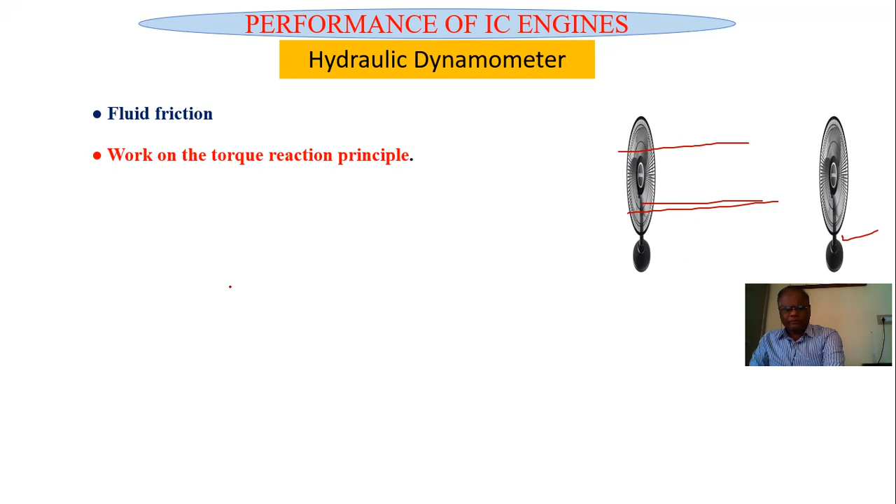This is called the torque reaction principle. Even though the force is not given from an external source, the force is available from some other component. Due to that force, this second component also rotates with the first component. This is called the torque reaction principle. In the hydraulic dynamometer, fluid is filled; here air is used as the medium, there the fluid is the medium. With this principle, the hydraulic dynamometer is constructed.

This is the diagram of the hydraulic dynamometer. The hydraulic dynamometer consists of the shaft. This is the shaft, which is connected to the engine shaft with the help of a flexible coupling. This is the rotor. The rotor passes through the shaft and is fixed on the shaft. The rotor consists of holes, blades or cups. This single hatching you're noticing is the rotor cover. The rotor cover also passes through this shaft, but it is not fixed on the shaft. It is kept on the trunnion bearing. It is free to rotate on the trunnion bearing.

There is a perfect airtight seal between this rotor cover and the outside. The water supply is given to this hydraulic system, and the water outlet is also there. This whole assembly is kept on this structure stand. The rotor cover consists of a load carrying bar, or load bar, and a load hanger. Because this is the sectional front view, it cannot be shown; assume it is connected to the rotor cover on the back side. Now, the operation: as I told you, the rotor consists of holes, blades, or cups. The rotor cover also consists of matchings of the same as the rotor.

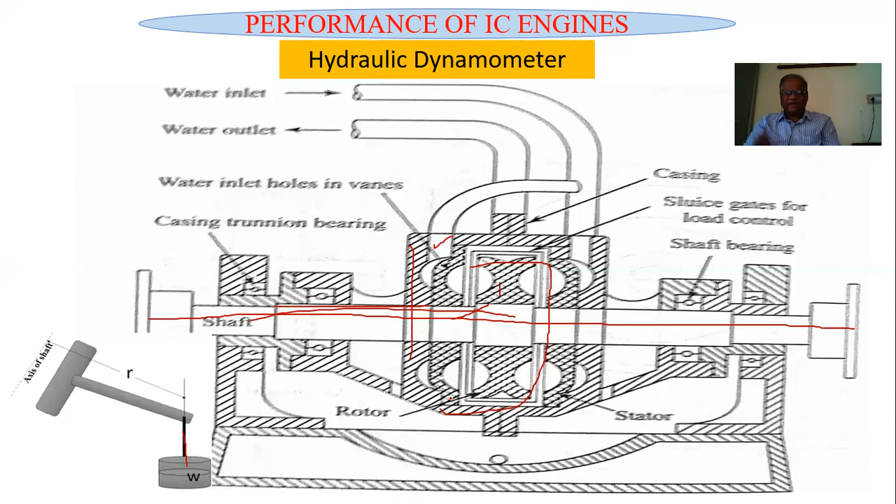Okay, this is the construction and working of the hydraulic dynamometer. How much torque is set up by this hydraulic dynamometer? Okay, as I told you in the previous lesson, the torque is nothing but the force into perpendicular distance. I have shown, say, this is the load bar. This is the load bar, which is connected to this rotor cover, and this is the load. The distance has to be measured from the axis of the shaft. That's why the distance is shown from here, not from here.

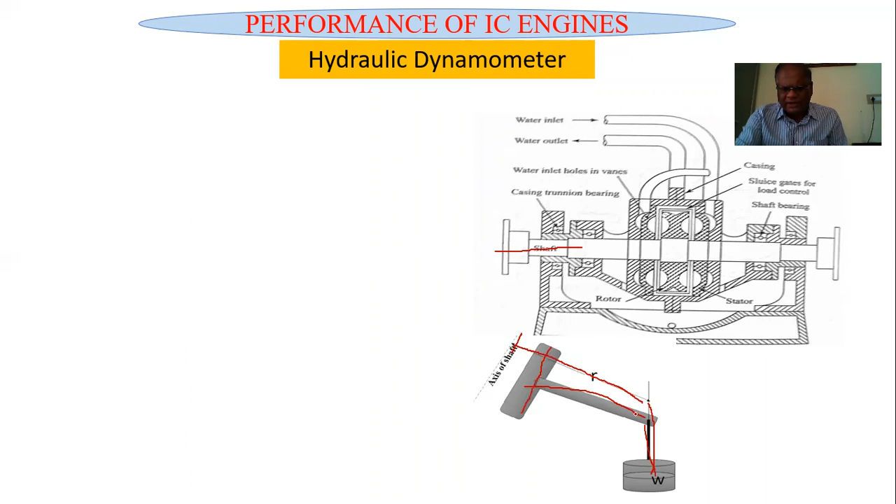See, this is the distance between the axis of the shaft to the line of action of the hanging load. That means this is the perpendicular distance. By multiplying this load with this distance, the torque developed by this hydraulic dynamometer can be calculated, where W is the load and R is the distance from the center of the dynamometer to the weight. Then T is equal to W into R.

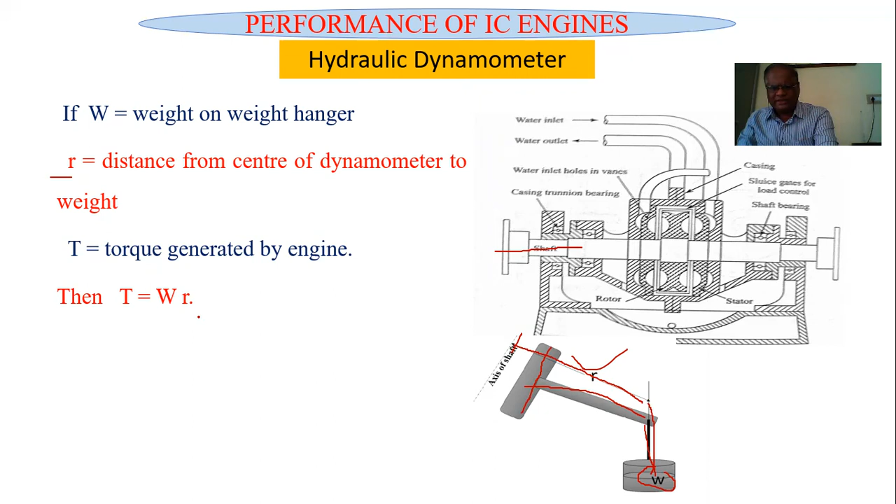Right. The main advantage of this hydraulic dynamometer is that cooling is not needed, because the flowing water in the system itself cools the generated heat. For heavy engines, this sort of dynamometer is connected to measure the torque of the engine.

See, after this I am putting up some multiple choice questions to ascertain how well you have followed today's lesson. After completion of the lesson, some multiple choice questions will be put in front of you. Then you yourself can ascertain how well you have followed the lesson of today. This is the first multiple choice question.

The hydraulic dynamometer works on the dash principle. I told you the hydraulic dynamometer works on the torque reaction principle. Here, torque reaction, torque multiplication, and torque generation are given, and all of these. All of these is not the answer. Torque generation is not the answer. Torque multiplication is not the answer. It's the torque reaction principle.

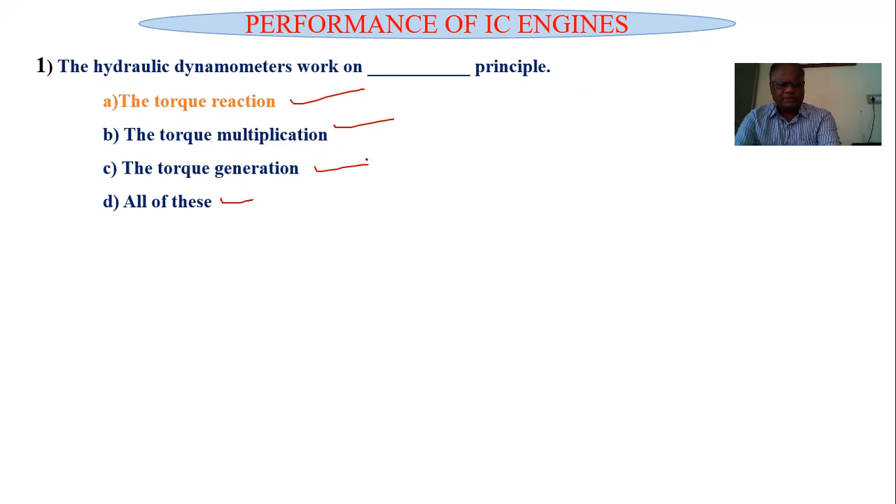Second one, the torque reaction which is generated by the engine can be measured by the hydraulic dynamometer. Sometimes you have to look into the answer and then follow the questions. Okay, it asks which relation is used to measure the torque. T is equal to W into R. No second thought, this is the answer. These are all the wrong answers.

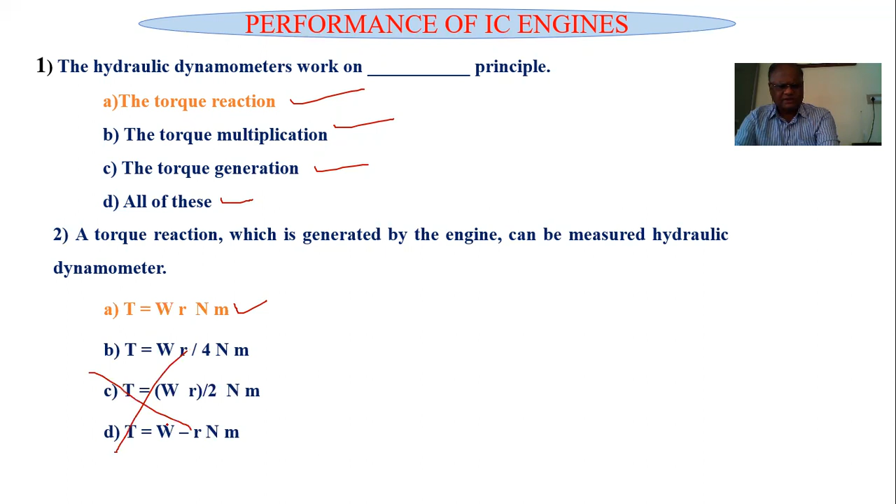Next, in a hydraulic dynamometer, the amount of torque set up by the dynamometer can be varied. I told you the amount of torque can be varied. That means, as it absorbs more load, more torque will be developed. To vary this, we introduce plates between the rotor and the rotor cover. Control of the water flow, control of the load on the arm, plates, all the above. Of course, making use of all these, the torque can be varied.

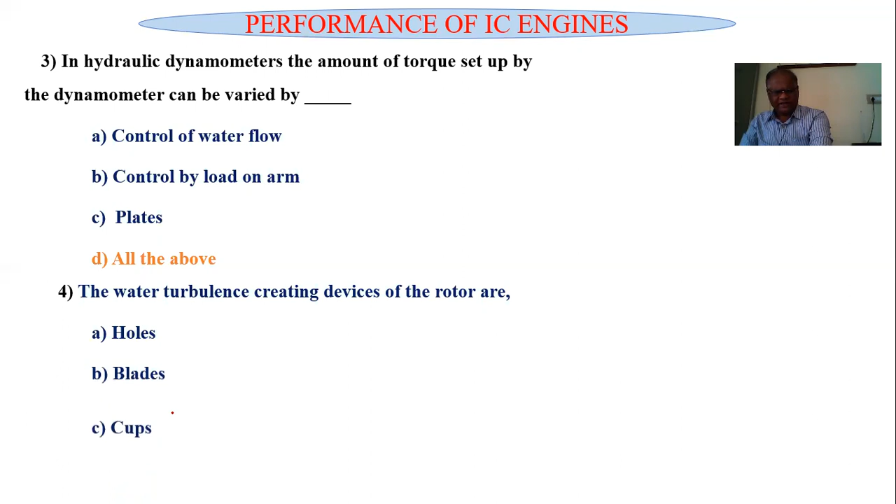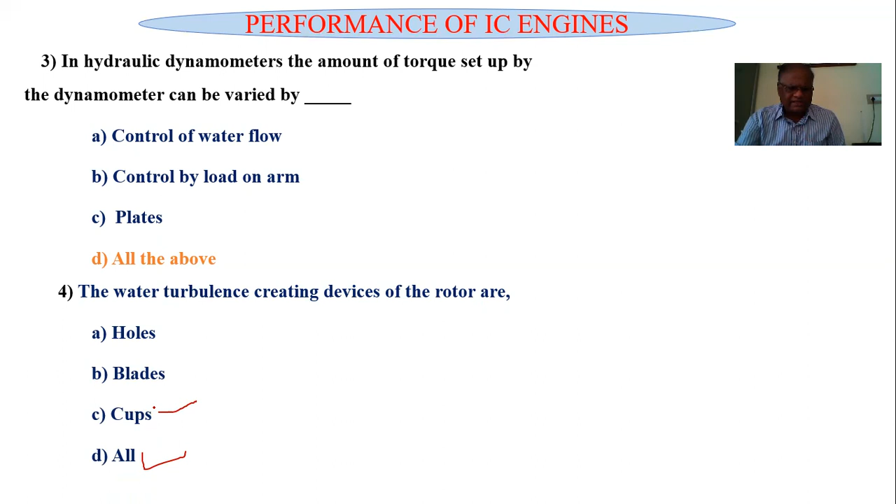Next, the water turbulence creating devices of the rotor are holes, blades, cups, all. So the answer is quite natural. All these sorts of devices are provided. The same matching ones will be provided inside the rotor cover.

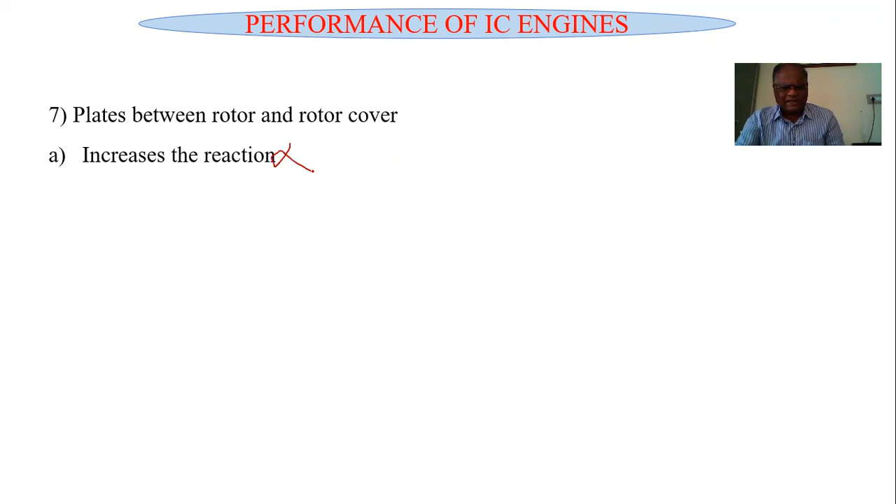Next, the plates between the rotor and the rotor cover increase the reaction. When the plates are introduced, they will not increase the reaction. Absorbs more load, no. Absorbs less load, maintains constant reaction. Okay, it's a very interesting question. When the plates are placed between the rotor and the rotor cover, it absorbs less load. That means the torque will be decreased.

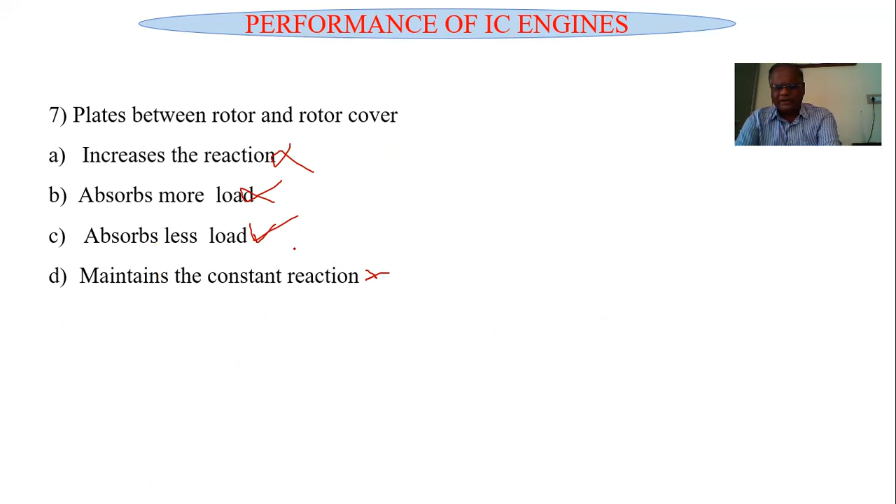Yes. Okay, this is the third lesson. Watch this lesson repeatedly and try to make out all the information pertaining to the hydraulic dynamometer. Lastly, what I would like to say is that the hydraulic dynamometer does not need any sort of cooling system, because the flowing water itself cools the system. For heavy engines where heavy power is to be measured, a cooling system cannot be provided to that engine. In that place, the hydraulic dynamometer is adopted.